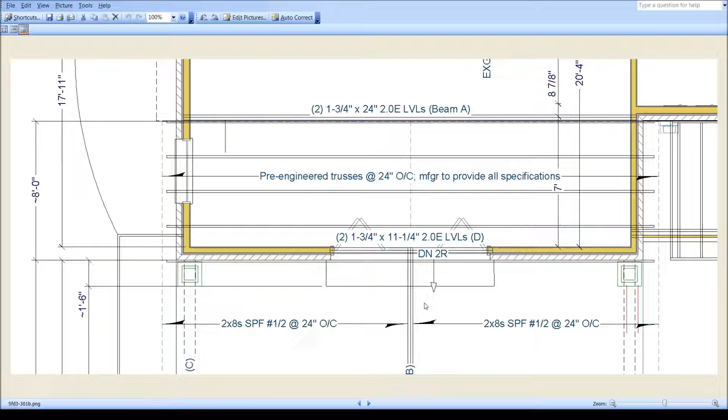These trusses are 2 foot on center trusses, and this is against that beam. I'm showing that as 24s. It says 22s will pass, but I think you'd probably be better off with the 24s. But with this 2 foot spacing, this last truss should technically be right in here. So I started by moving that back to where that truss is aligned where it needs to be.

You know, that trims off. That was 8 foot to the outside, and then we moved that back to 6 foot 10 to the outside. So we trimmed off about 14 inches on that inside floor to make it make sense with these here. So that brought this interior dimension down to 16.9 from something close to 18 feet. So the same 14 inches comes off of that there.

But that 14 inches taken away from here was added to the patio depth here, going up from 16.2 to 17.4 interior space. And then I did the same thing with that 2 foot on center, because this roof is continuous all the way through here. So I did that same thing with these rafters, which are 2 by 8s, and that 2 foot on centering works out this way.

So I added that to the patio as well, bringing this roof out from 22 feet to 23 foot 3 and adding even more inside. And so now the inside of this patio, if we use these 16-inch columns here, is 18 foot 8. And all of the beams you see in here and all the members are the final sizing as shown.

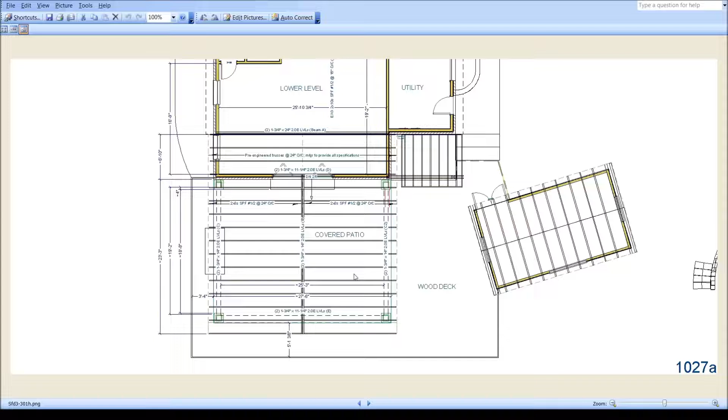Now I did want to mention, in terms of some of these beams, which are not completely finely sized here, there are a variety of solutions you can use. I'm just using these LVLs, but they show another 2 LVLs for these edge beams, for example. Now this one will be different because there's going to be a fireplace here interrupting that.

But for this 14-inch beam C, for example, a couple 14-inch LVLs will do it, but they are saying if you go down to these, you can use a couple of those at lesser cost. So you would have to see what the availability is on some of these alternative products. Similarly, this is the ridge beam, which I sized on this plan as 3/14s, but they say it can be done with these timber strand LSLs if those are available.

And you can see the deflection's a little bit more going to this alternative product. The total deflection here is just under 1 inch, and here it goes up to about 1.25 inches. Not that that's a big deal. It still is meeting code. But I just wanted you to know that before I went too far along. Once we know exactly how big that space is going to be, I will size them finally, see which ones are the least expensive, and call those out as the first alternative.

But returning to the plan, this is using that 2 foot on center here and down here, and I agree this is a lot of work to just pick up maybe 6 foot inside. But we will return to this briefly at the end of the film. To bring this along a little further, I have shown this fireplace here, which is a prefabricated wood-burning fireplace. I can't remember the model number, but I believe it has a 3 foot wide opening.

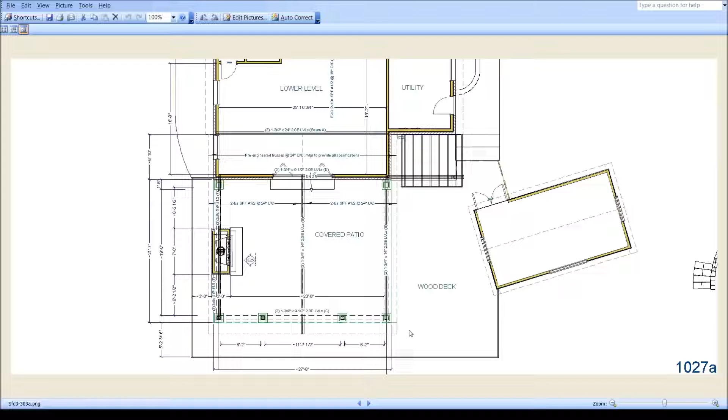And I didn't understand exactly how you want to lay the furniture out in here at the time that I designed this. I have a better understanding now, and we'll explore a little bit, we'll head in that direction as the film proceeds. But starting, I put an island bar in here that I'd used in another project, which is 7'0" by about 40 inches, with seating on both sides.

And these are the dimensions when I did that. I'm not going to spend a lot of time on this because a lot of it's irrelevant, because this isn't really the layout you were looking for. But since this was done at the time, I'm going to continue to explain it or show it with this here, and now I'm showing 2 columns down here, and those are spread about the same as this.

And when everything's like this, it gives you this area in here for arrangement, but again, some of that's irrelevant because we have other things that are going in here in a different way. But this was just what I was working with going along. I gave you this 17-foot wide by basically 19-foot square rectangle on this side of the bar without any cooking appliances in here or anything. But I had put this same type of furniture arrangement in here, and then I got some dimensions in here.

And now these columns down here, so one alternative was keeping this spacing here at 6'2" and 6'2", and the second alternative is moving those in so that these are 3 even spaces. We have to think about where those stairs are going to ultimately come off of here, but that's not really covered in this film. But that was one of the considerations, just horsing around with this.

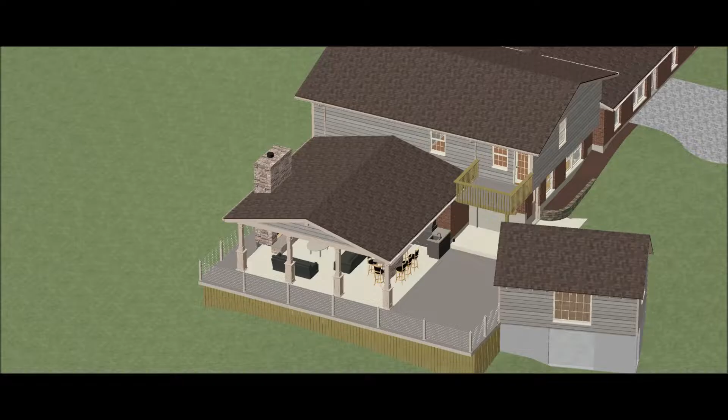And after that had been done, we talked on the telephone. I got a little better idea of what you're looking for in here. I'm not completely clear on it yet. Maybe you aren't either. But so we went from this to this, where I made the kitchen at the east side like this, and this made us a nicer kitchen for sure.

And what I'm showing is 36-inch refrigeration here, 42-inch grill, and that requires a big cutout. So this cabinet's like 50 inches or so. And then a double wall sink, 36-inch cabinet, and a 24-inch cabinet. And with this 19 dimension here, we still have 3.5 feet on either side between those columns and the wall here.

And this island is this 10-foot long bar, and I'm showing seating on both sides, which gets you seating for 12 if they're seated on both sides of this with a typical 2-foot clearance between chairs. But if we put them only on one side, facing this way, it's something like this, and then presumably a television is up here instead of, or in addition to, one here.

And I believe you said you were going to put a big table back here. I don't really show that to any great extent in this film. Something like that, but that's just a 6-foot or 7-foot table. Maybe yours is going to be a big round one. You can fill me in a little on the furniture arrangement, and I can model that for you.

But for now, I put this together here just to give you a feel for what you're working with. The other thing that happened here was the kitchen got a little smaller because while we could have these beams run right, these 14-inch beams run into this wall framing here.

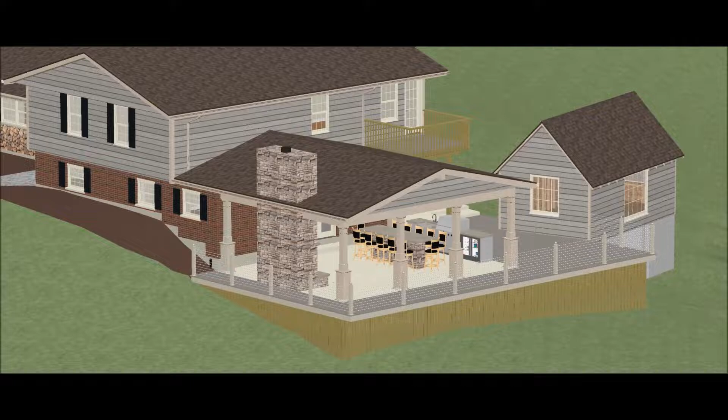And these few photos are just looking at this column arrangement down through here. Again, this can be open up through here. This beam does not need to continue all the way out here, so this could be open. There would have to be a vertical piece here coming down to whatever beam we need across here. But these are just different arrangements.

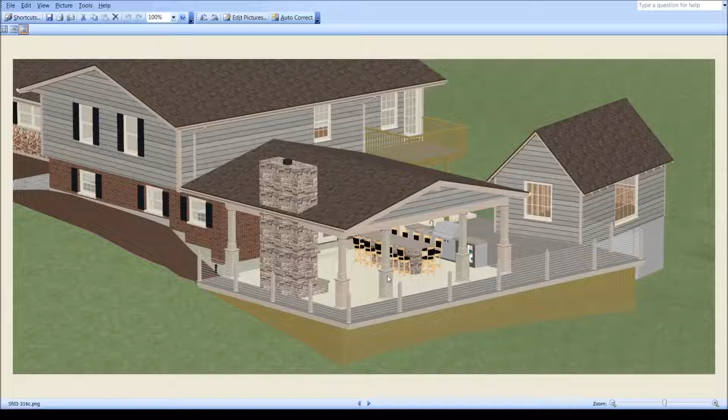This was with the roughly 8-foot spaces, and this is where it's just one in the middle, and, colors are different, but these are these ones pushed out where it's smaller here and closer to 9 or 10 or 11 feet here. I probably prefer the one where they're just 3 even spaces. I don't know about the single.

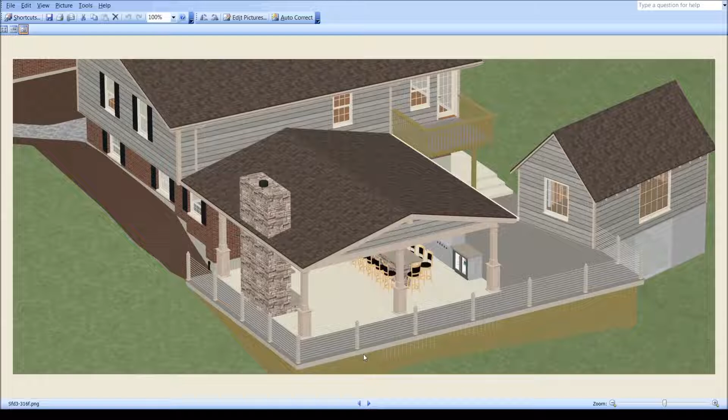Maybe that's preferable. Again, we have to decide, we have to see where these stairs are coming off of here, along here. I'm assuming, by the way, that there'll be a set of stairs here and one here. Maybe there's just going to be the one.

But anyway, I did want to try to look at this color a little bit, or just try to get it adjusted. And you can see that I have adjusted the siding to some extent, like this, and if all that brick is painted, it would be something like this. And maybe the siding's a little green, maybe I have the colors wrong, but presumably it's closer to what you were thinking of. And so there are 2 more moves in this film to show you, and that's about as far as I've brought it.

And the first one is to go ahead and add the 2 feet to that interior space here, coming out another 2 feet like this. Now notice that this doesn't change this lower margin here, because we had 5 feet to work with here. So when we brought that whole structure, the interior part of the addition, out another 2 feet, this pathway here just got more narrow between.

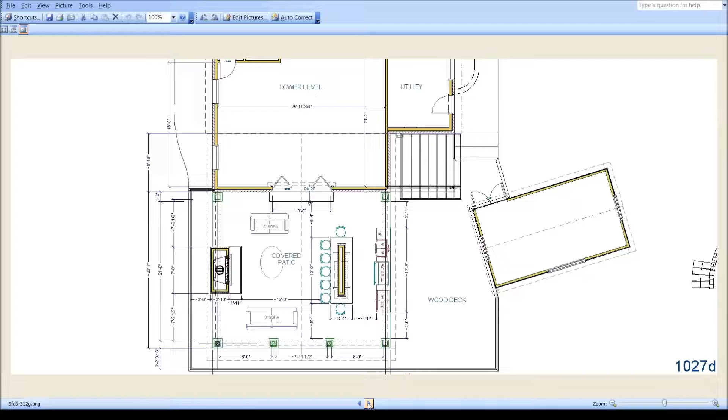And then you end up interior with a bigger space, where you are going from this 16'9" interior space to 18'9". And then finally, having done the 2 feet here, now we've picked up almost 8 feet inside. Well, we have 8 feet inside adding. And then do we want to make this covered patio itself larger also by 2 feet? And then you're like that. And that's as far as I've brought it right now.

So you went from that to that, adding the 2 feet of the interior space. And then if we bring this patio and we add another 2 feet over there, it's like this. So that is as far as I've gotten. The only other thing I wanted to mention is at this point, if we come out like that, I thought that brick is a little green, so you can guide me on the colors, if we're getting closer on these colors.

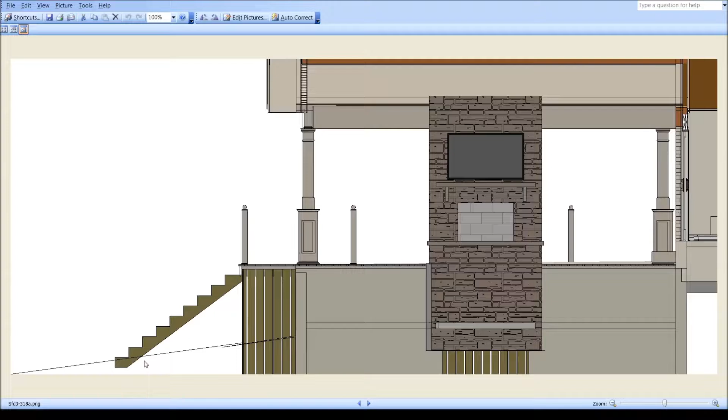And then the other thing I wanted to mention, right now, if it's shown like that, with pulling that additional 2 feet out inside and outside, which means we've brought this edge close to 2 feet further forward, with these 7-11 type risers, it looks like 10 to the ground. And over here, if we do have stairs over there at the shed, it's going to take a little bit more stairs, a little steeper maybe, something like this. And then maybe that's just a 6-foot double door. But that is as far as I've brought it.

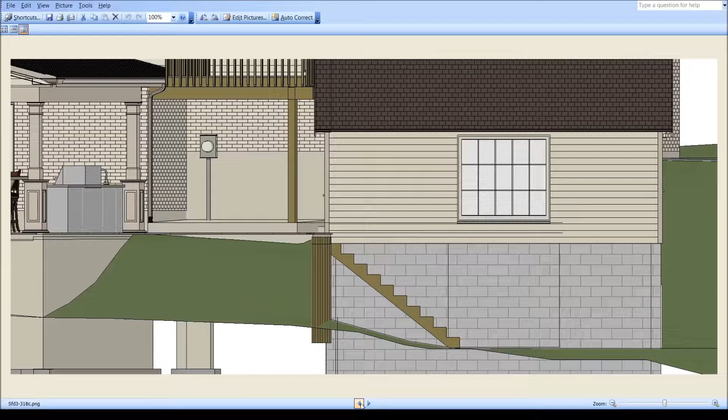There's a quick turnaround of this structure with the big addition, with the interior, with just this. There's a turnaround of this structure here then. And I will presumably talk to you soon.